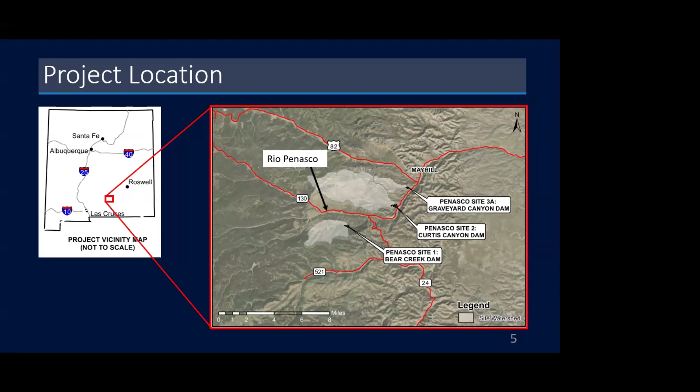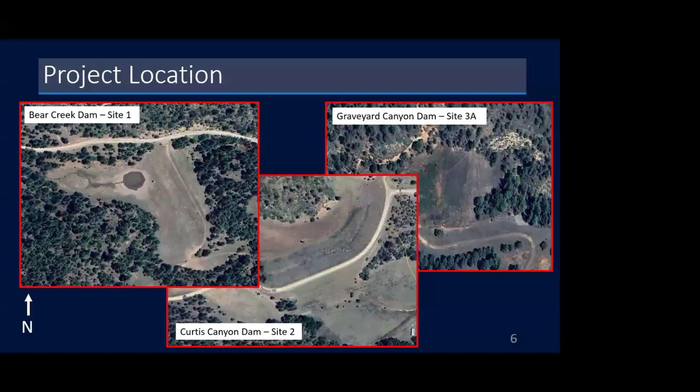So if you've been out there, these are just pictures of what they generally look like. They're all earthen dams. So you got fairly large, from 50 to 65 feet high earthen dams. They're a little different configuration, but they're all earthen dams. All of them have what's called an auxiliary or emergency spillway. So basically, if you go out there, there's an area that's cut lower on one side of the dam that lets water go around the dam, the emergency spillway, and they all have a riser. But go to the next slide, Ezra. They all have a riser structure similar to that one that lets water in and then goes through pipe under the dam to let the water out. That's referred to as a principal spillway.

So the original plan was these reservoirs provided flood control and sediment retention. So the way they work is they're normally dry. When a storm comes, the reservoir starts to fill, water goes into that intake vertical structure, then out the outlet pipe at a very low rate. So these dams were designed to provide flood protection for up to a 25-year storm. That's what they were designed for, and the whole sediment coming down. And so how they would work, you get a storm, let's say up to a 25-year storm, they would fill up, a small amount of water gets released on the principal conduit, but it keeps all the flood waters contained upstream, so it protects the structures, people, roads downstream.

If you get a storm larger than that, then the water flows into the auxiliary spillway and flows around the dam. So for storms above about a 25-year event, the dam is really not providing much benefit. The water is just passing around it. And that's how a dam is supposed to work. When these dams were first built, they were what's considered low hazard dams, which meant that if they were to fail when they had water, there was not the risk for loss of human life. It would be some minor damage.

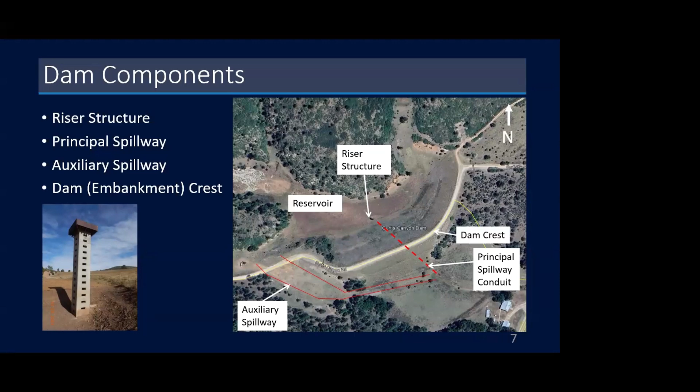Since they've been built, people have built downstream, there's houses downstream. So if they were to fail right now, then they're considered high hazard dams. It means there's a risk for possible life loss, which changes the design criteria. So they were built in the 1959, 1960s for flood protection. Like I said, originally rated as low hazard, but they're now high hazard, which means they have to meet different standards than they had to meet back in the 60s.

So two things have changed. The standards overall have changed a little bit as the engineering community learns more and understands things a little bit better, but also the hazards. The big change is that they now have to pass larger storms without failing. So with flood control dams, at some storm, when the water gets high enough, it goes through the spillway. If more water comes in, it overtops the dam. When dams overtop, they generally fail.

And that's a concern. With a high hazard dam, you've got to design to a much higher storm event to provide protection, because if it fails, you release this big gush of water, a big flood wave coming down the valley, which puts a lot of people at risk. So there was some work done in '23, and it was found that these dams don't meet some current standards, and that's why we're doing the project.

There may be some other things they don't meet as we go through more detailed studies, but what initiated the project was the spillways aren't large enough. So they basically can't pass the storm events that are required without the dam overtopping and failing. The crest width isn't wide enough. That's pretty minor. There's no what's called filters.

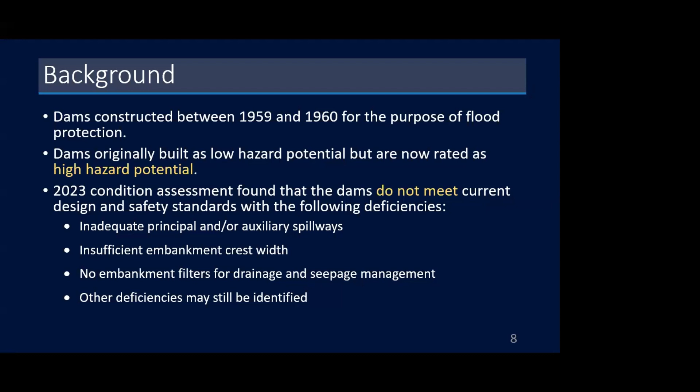So earth dams are not impermeable. Water does flow through. Modern design criteria puts in filters, uniformly graded sands or gravels that collect that seepage and make it drain out in a controlled manner. These dams don't have that, and that's considered a deficiency with current design standards. And there may be some other ones that we identify as we go into more of the detailed work.

So the benefits they provide, like I said, are sediment retention. If you've been out there, you can see there's quite a bit of sediment that's accumulated. The sponsor has, at times, in some of these dams, removed some of that sediment to keep that volume available for flood storage. They're considered to provide flood protection for minor events. And a minor event means a 1 in 25 year storm, which is a fairly routine storm event. Doesn't sound like that, but it's pretty routine. Flood control projects being done today are more designed for 100 to 500 year type protection.

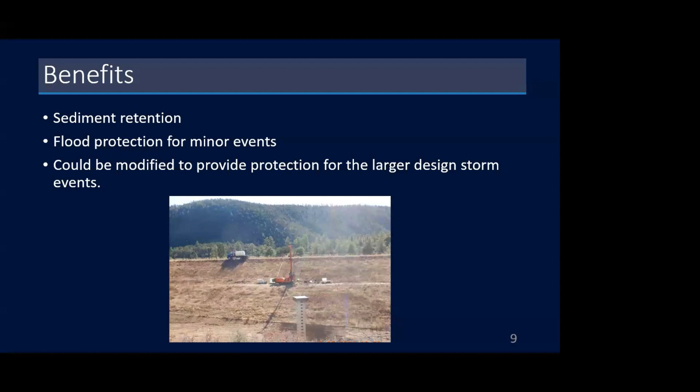It doesn't mean it will occur every 25 years. It means there's a 1 in 25 probability that it will occur in any 1 year. So theoretically, you could have two 25-year storms back to back. It doesn't mean that that's how far apart they are. It's just how often that amount of water would likely fall. And so how we look at that, go ahead, Ezra.

So how we look at the hazard is we do hydraulic modeling. We say the dam's filled with water and more water is coming in than can be passed through the spillway, and it gets to the top of the dam crest. Water overtops that. You've probably seen erosional failures around your communities, but once it overtops the dam, the downstream slope is pretty steep. That water picks up speed. It starts to erode the embankment. It erodes backwards and creates a hole through the embankment. Then all that water rushes out.

We model that and look to see what's impacted downstream. And we look at two things: how deep is the water and how fast is it going? There's criteria for people: in general, if the product of how fast it's going and how deep it is is 7 or greater, it generally knocks people off their feet, and that's considered a potential life loss.

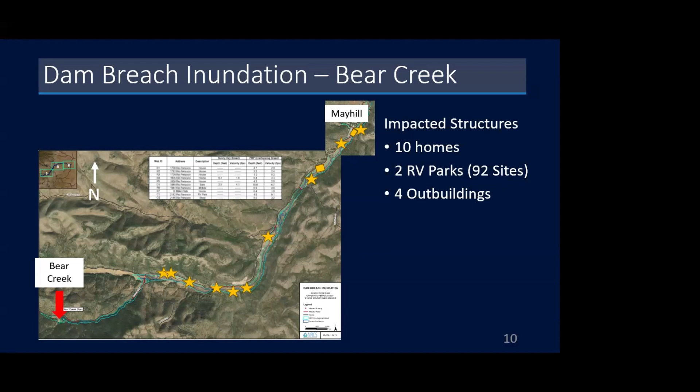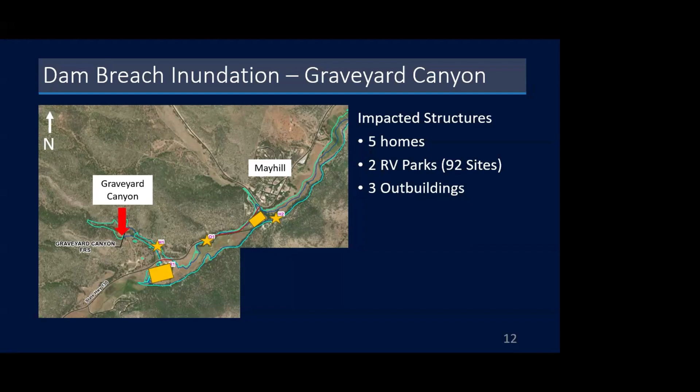So all these stars on here are places where there's buildings or homes or an RV park where, if this flood came down, there would be a risk of loss of life. So there's a pretty high risk of potential loss of life if these were to fail with water behind them, and that's why we're doing this study, to protect public safety. It's a similar map for each dam, but each of them has quite a few homes within this floodway. A few less down at Graveyard, but that's why all of them are high hazard, because there are places where people spend time that would be at risk.

I'm going to now turn it over to Mercedes, who will talk a little bit about the watershed program and what NRCS does, some various programs that NRCS offers, and why they're involved in this project. Take it away.

Pleasure. All right, so hopefully y'all can hear me okay. I'm gonna try to stay over here in this area because that fridge can be kind of loud.

So the whole idea behind this is, we're looking at the dam. Obviously, there's some deficiencies. They're not meeting current federal and state dam safety standards. So the idea is, how can we improve this dam? But the idea behind our watershed program is we have to look at it at a larger scale than just the dam itself.

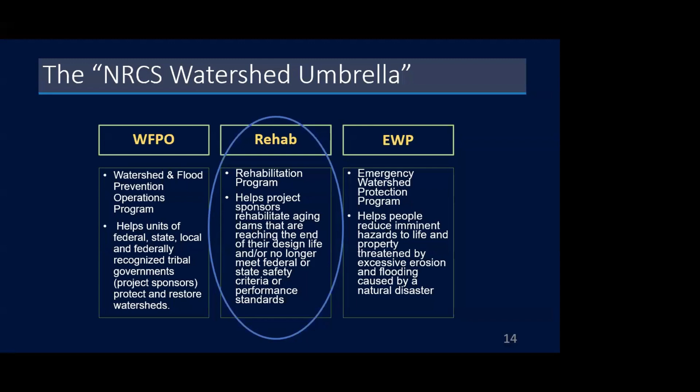And then on the far right-hand side is our EWP program, our Emergency Watershed Protection Program. That normally follows a natural disaster. So with a lot of fires we see in the state of New Mexico, we can help out with EWP after that, help landowners who are impacted directly or indirectly by the fire or any post-flooding. We can help with that as well.

Next slide, please. Program requirements. So we're just going to focus on the one I had circled. So the rehab program, what may be included, how does my dam qualify? Like I said before, it has to be an NRCS built dam. So we can't help with, say, a dam that was built by the Corps of Engineers or a dam that was built by FEMA.

It has to be an NRCS built dam. But other than that, it's pretty wide open as far as what we need to consider for it to actually qualify for a program. It could be anything from, we got a letter from the Office of the State Engineer Dam Safety Bureau that says we're out of compliance.

It could be something like, we don't need this dam anymore. It's not helping us out. It's not helping out the community. So we want to decommission it, basically remove it altogether. And then it could be a bunch of things in between too.

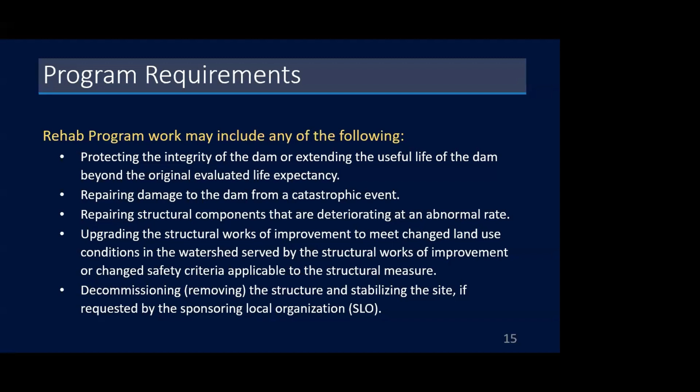Even following a catastrophic event, we just had the flooding over there in Ruidoso. Is that right, Eli? Yeah, so a couple of our dams over there got blown out from the flooding that occurred in those towns. So we're helping with that as well.

So as far as cost share goes, this is the basic cost share. We don't change it. 65% federal, 35% on the sponsor, but it is only when it comes to construction. So we have 4 phases that I'll explain in the next slide, but this only applies to the last phase of the project itself. So NRCS will pay 100% of the cost share up to that construction point. And then that's where the 35% comes in.

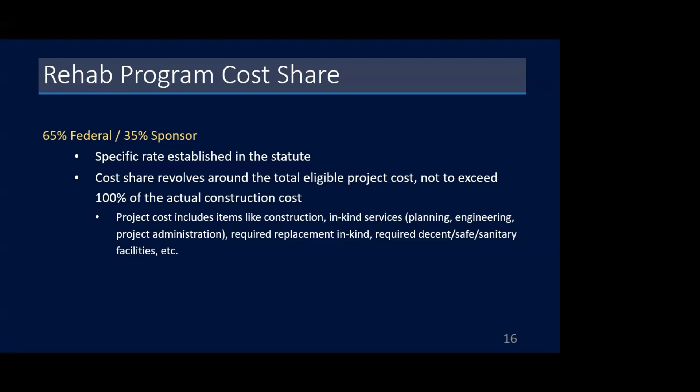So that can be anything from the actual construction improvements to the dam, to permits, to land rights, easements, any of that stuff. That's kind of where that 35% comes into play. Next slide. And then here are the 4 steps. Obviously, we're in step number 2.

So the dam assessment that we conducted was a couple years back, and that's kind of where these deficiencies came up that Bob was talking about in an earlier slide. That's kind of what we figured out in our dam assessment that we completed. We're in the rehab planning phase right now. And then once we get that done, 18 to 24 months is what we try to shoot for. When it comes to these plans, they can be very drawn out.

I know a lot of folks say we have a resource concern and we'd like something done now. That's one of the problems with our program is how long some of these can take. So if everything goes right, you have the assessment, planning, design, and construction. That can be up to 10 years if everything goes right.

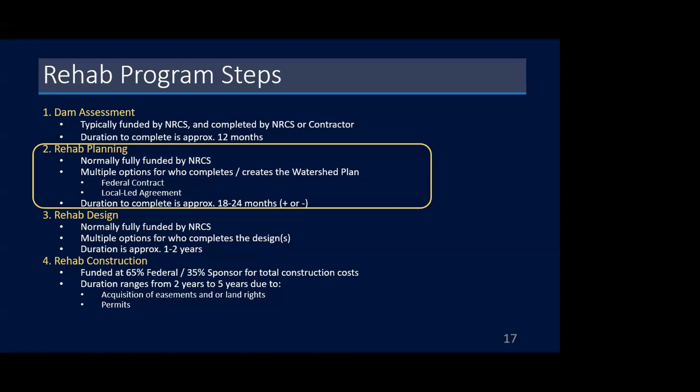But there's also another limitation as far as funding goes. Some years we get funding across the country we can utilize. Other years, we don't get any funding. So that can also play a factor in when things actually get done and we see some dirt turned on the ground. So there are a couple limitations, but I definitely know RGH is trying the best they can to get at least the planning phase done in that 18 to 24 months. That's what we're shooting for.

So as far as our web page, I actually am going to be updating this on a monthly basis. Obviously 18 to 24 months, that's a long time. And so if there's any questions at all as far as project updates, that's the website where you're going to be able to find it. And I know this was included on the notice that y'all got in the mail. And there's also another little fact sheet here at the table as a reminder of where you can find these updates. And I'm going to post the slides on this web page as well.

And I think this presentation's recorded. Is that right? Okay, so I'll be posting the recording on here as well, just so that way if you need reference or if you want more information, you can always go to this website. And I think I'll hand it over to Katie. Thanks, folks.

Okay, we'll transition now to talking a bit about the main federal law that is driving this environmental review process, and we'll give you a feel for what you can expect to see in the planning document that we will produce at the end of this process. So NEPA, or the National Environmental Policy Act, is a law that pertains to all federal agencies. It basically requires them to consider environmental effects before they make a decision on any kind of proposed action.

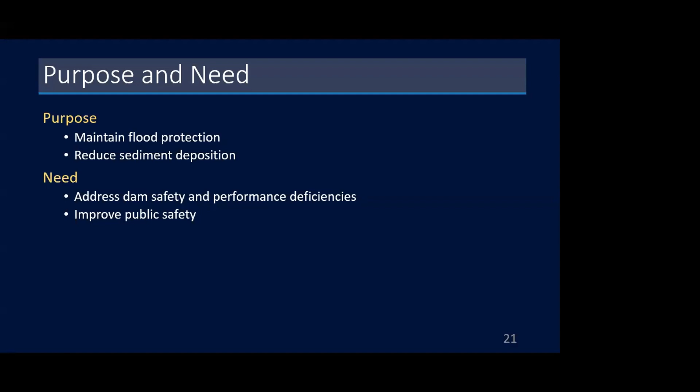So all of our projects need to look at alternatives that would meet the authorized purposes, which are flood protection and reduce sediment deposition downstream. And then why do we need the project? We need it because we said the dam has deficiencies that don't meet current NRCS or state standards, and basically to improve public safety. Those standards are in place to maintain public safety, and that's why we're looking at this project. So our scope has 4 phases.

I'll do a high-level overview here. We have some more slides to explain these, but right now we're in phase 1. So phase 1 is we're trying to establish the boundaries, or what are the key things the purpose and need, what are we looking at, kind of what are our objectives we have to accomplish. We're trying to get all the background information collected. We're collecting some other data we need to evaluate it, and really focusing on the purpose and need. And then we're starting to get into looking at various resources that are out there now. So we start looking at alternatives. We know what resources we may or may not be affecting.

And then phase 3 is we formulate alternatives. We start with a very broad range of alternatives, and then we narrow those down with the intent of this phase really getting to a preferred alternative, and there's 3 dams. So the preferred alternative could be different at each particular structure. Usually these projects are done with one dam. We have 3. So we're looking at alternatives for each one of those, and the preferred alternative could be different for each different canyon, not be the same.

And then it's all put together into a final document. It's really the decision document that meets the NEPA criteria, meets the federal regulations. It really is the framework for why the sponsor and NRCS selected what they wanted to move forward with, and then that would be the alternative that gets carried into design if the project moves forward and ultimately would get built. So the goal here is to make sure that we've covered a broad range so that there's not an alternative we didn't think about that comes up 2 years from now, because that sets the whole process back.

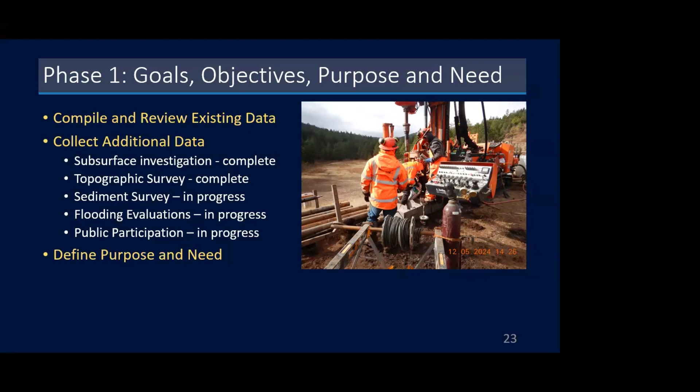And then define or refine the purpose and need a little more specific to make sure that all the alternatives are focusing in on that, because that's what drives the process. What is the purpose and need of the project? And then Katie will talk more in detail, but we're looking at resources, environmental, economic here is more tied to economic impacts on the community, not direct construction costs. Those are looked at on the engineering side, but there's also economic impacts, let's say from flooding, let's say houses get damaged, things like that. So those would be looked at, impacts to cultural sites, and then just social impacts to the community.

And then we'll analyze those resources, doing both desktop and field investigations, because the project really has to compare what's technically feasible, what are the costs to build it, what are the impacts, to come up with a preferred alternative. It's not just the lowest cost or the least impactful, it's what is the best alternative. All those have to be weighed against each other, and that's what we do in the process.

Katie? You haven't figured out, I'm the engineering side, she's the environmental side.

Okay, so as Bob said a couple of slides ago, these will be more of a desktop analysis at this point in the planning process. So we'll be looking basically to provide a baseline to evaluate the alternatives against as the planning process moves forward. We take a bit of a larger view at this point to provide some flexibility in the identification of

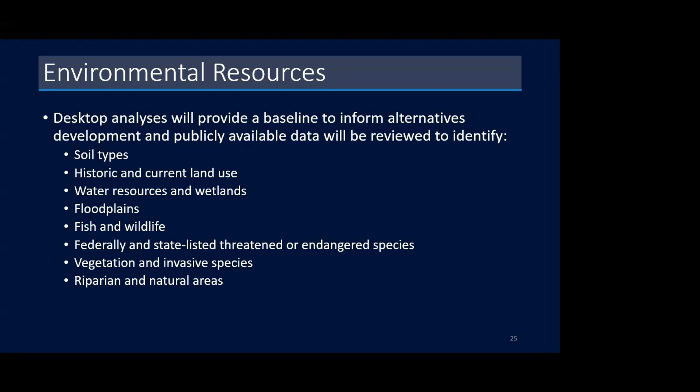Similarly, we'll be conducting these desktop reviews for social and economic resources. These two will be identified with publicly available data. For social resources, we'll be looking at things like population, income, poverty data, public health and safety concerns predominantly related to flooding, population centers, and transportation networks.

When we consider economic conditions, we're going to be looking at some of the demographic data for the area, as well as land use, property values, especially some of those structures that Bob showed earlier on the mapping that are downstream of these dams, as well as some historical information on floods that have occurred in this area and the types of damages that have incurred.

Lastly, we'll also do a desktop and literature review for cultural resources. So these will include things within the study area as well as directly adjacent to the study areas at each of the 3 dam sites. And this review will include archaeological sites, sites that may be state or nationally listed on historic registers of places, as well as tribal cultural practices and things of that nature.

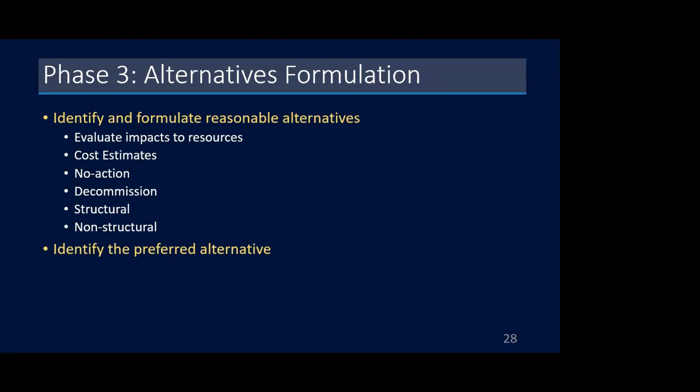So out of this process comes a report that's basically called a Plan EA document that summarizes all the work that's been done. It identifies the alternatives considered, the ones that were dismissed, why they were dismissed, what the impact areas are for those, and then presents the preferred alternative.

With that, there's work that's been done to look at property ownership and easements. If we're doing work, we don't get those at this time. We identify what might be needed if we don't have the right property, or if we're going off somebody else's property, and that really gets fleshed out usually towards the end of this process or in the next phase.

So there's really 3 formal places where we solicit input from the public. There's a meeting today, which is where we give you an overview of what we're doing, and we're going to get to asking some questions later on about some resources, which ones you care about, and any comments or ideas you want us to consider. If, hey, I lived by this dam, and if you thought about this, we want to hear that tonight. So we're getting input from everybody here.

And then once we go through the alternatives and either have or are close to getting a preferred alternative, there'll be another public meeting to explain what we've done, why we've done it, and present the preferred. And then we write the formal document. There's multiple reviews through the NRCS process, but once they believe it's a good quality draft report, it goes out for public review. And each of those periods have a 30-day comment period.

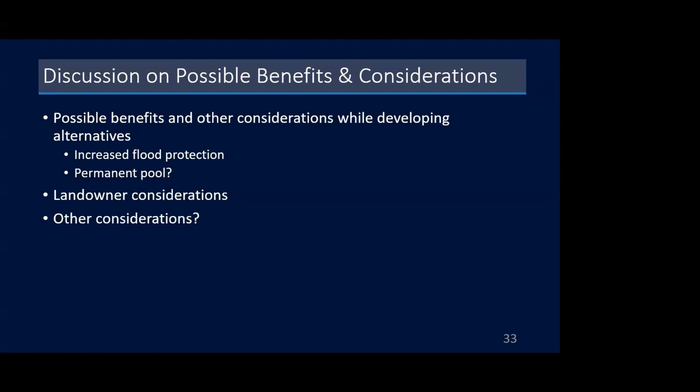Yeah. So the question was, in terms of a permanent pool, could that be used for recreation? Will that be considered? And we're not saying we are considering that. We're asking if that's something that the community would like us to think about. I'm not saying it's possible. It may not be possible, because one of the challenges with these dams is that the storage volume that exists is much smaller than the amount of water that comes down during most storm events. That's why we can't pass big storms. So the more of that storage volume you take up, whether it's sediment or permanent pool, the less flood protection you provide.

So the purpose for these has always been flood control and sediment retention. And so through the rehab program, we can't actually add recreation as a purpose, because it is more looking at rehabilitating the existing structures for that original purpose.

The one purpose I think they typically allow is water storage or water use, like municipal water and things like that. Sometimes they allow that to be added, but the purposes are kind of limited on these rehabilitation projects, just because really the focus is that original purpose and need that goes back to the 50s and 60s. So it's limited in how many additional things we can address. But no, they were never intended for recreation.